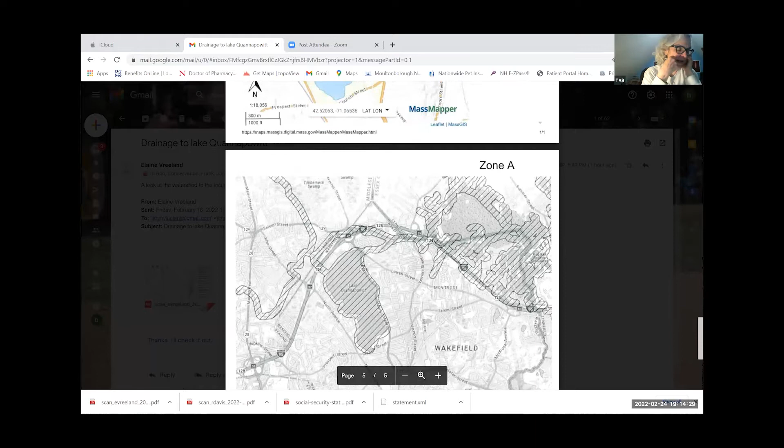Now, were you going to talk about the fact that Quannapowitt is a Class A water with Zone A? Rebecca had put that on, and I thought that portion of the discussion would be better left for the next meeting. I'm still trying to find out if projects filed before November of 2021 are grandfathered or not.

But it will be a Class A water body going forward. I thought that rather than give all that information tonight, I'd put together an information package on what difference that's going to make and send it to you before the next meeting. So for this meeting, we're just doing Lake Quannapowitt and its tributaries.

Just so you know which way the water flows—and there it is right there. Because Quannapowitt feeds into the Saugus water supply, Quannapowitt and its tributaries have now been classified as a surface water supply and a Class A water body, suitable for drinking. It was Class B previously, which is suitable for swimming and boating.

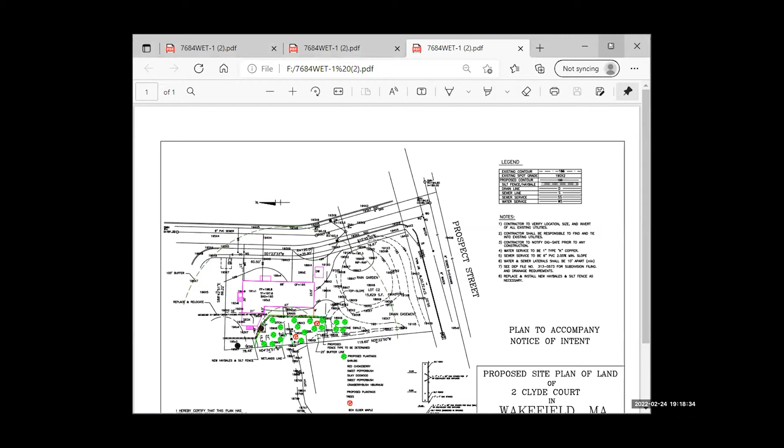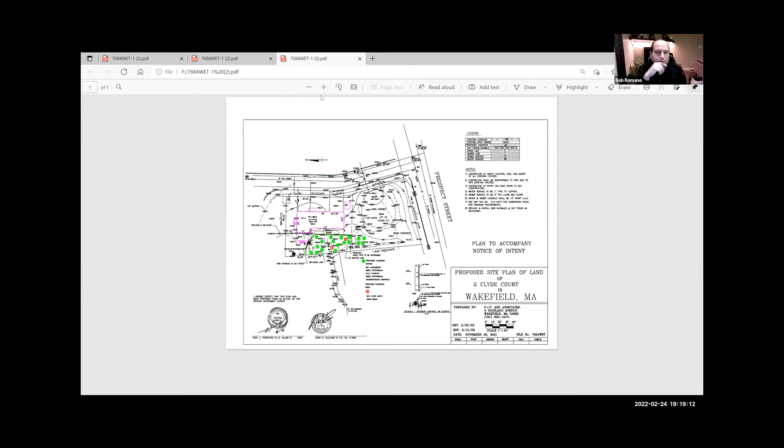Okay, you should have the site plan on your screen. Got it, let me zoom in. Can I zoom in on it? Scroll to the right and there'll be a plus. Actually more to the right, Paul, you'll see a minus and a plus. I'm looking for it, think it's behind, can I close that out? Actually no, just... there we go, I got it, right there. Let me bring that up. There you go.

Okay, based on our last meeting, we did a little bit of revisions on the locations of certain things. We were going to hold 8 feet off the rear of the building as a landscaped, grassed area, and we put in some plantings, relocated some of the plantings, and put in some new trees.

I've been in touch with James Emmanuel, who's doing the landscape work for us. He's on vacation this week so we didn't get to finish this up, but he'll be back Monday, so I can get the final planting amounts and actual locations on the plan. But I think you could possibly make that a condition.

So we did show the location of the new hay bale line, and also the proposed fence, which will start right here and run up along, then behind the hay bale, and then come back down right along the drainage easement.

Could you just again show the fence? Where is it relative to the hay bales? The fence will start right here in the corner, run up along to an existing 10-inch tree, then along the tree up to the hay bale line, then along the hay bale line over to the easement line, this is the drainage easement, and then back down to the intersection of the easement.

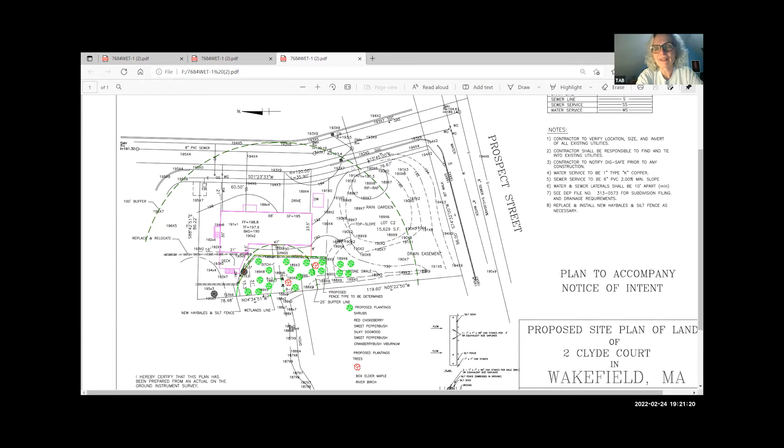Yeah, it's tough when it's on a 20 scale and you're trying to work in a small area. Yeah, because it's pretty much following the hay bale line, it mostly runs right along the hay bale line.

As for the size and type, I've talked with the owner. There's the possibility of either a metal fence or a metal post with a laminate on it, like plastic. We'll either do a hoop chain, like a double row going along there, or we might use granite posts. Those will actually last a lot better than putting in a cedar fence. Agreed. I also expanded out the planting area to outside the 25-foot buffer.

That'll be in this area, right along the swale. Then again, on the opposite side, right in this area here. So that basically accounts for the lost area of the 25-foot buffer between the house and the hay bale.

Now, Paul, how did you pick out the locations for the two trees? What was the design criteria for that?

Well, one's a pretty fat wet one, so that one is close towards the water's edge. That's this one down in here. And then this one's a little bit closer but it's still a wettish area, just a little bit more upland. I've talked with James, we were going over the different plot trees, and he's going to come back to me on the specific ones.

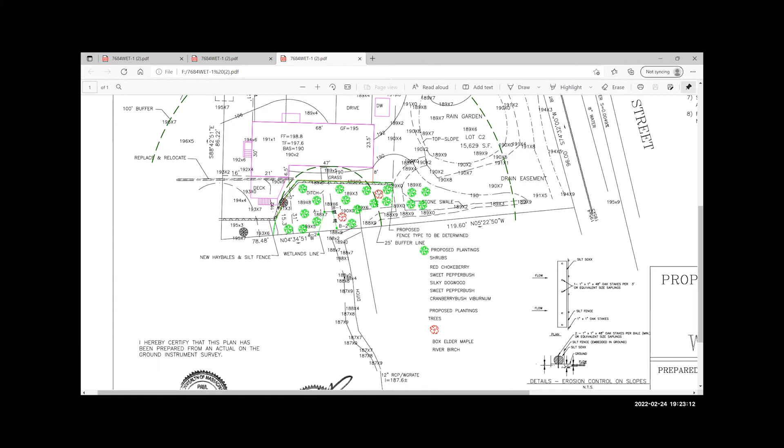So that one tree, Paul, how far away from the house is that? I'm just thinking of when it gets to a mature height, how big would it be? It's a medium height tree, so it's gonna be probably about another 8 feet, so it's 8 feet off the deck, 16 feet off the house.

Paul, I remember we did ask for the deck to be squared off. We kept the deck the way it is. The deck is the same where it is now because we need a second means of egress, and that's actually coming out of the dining room. The next door is a bedroom.

Was there anything else that we asked for? The other thing we talked about was the possibility of doing a conservation restriction.

We can, I mean, I can draw that plan up and review it with either Rebecca or Elaine prior to its finalization. That could be part of what's written into the deed and recorded at the registry.

And what would that conservation restriction say, Paul? Basically, that it's a no-touch zone. You can't go in there and cut the trees down, bushes down, put in grass, fill - that would be important. Or move the fence? Move the fence, yeah.

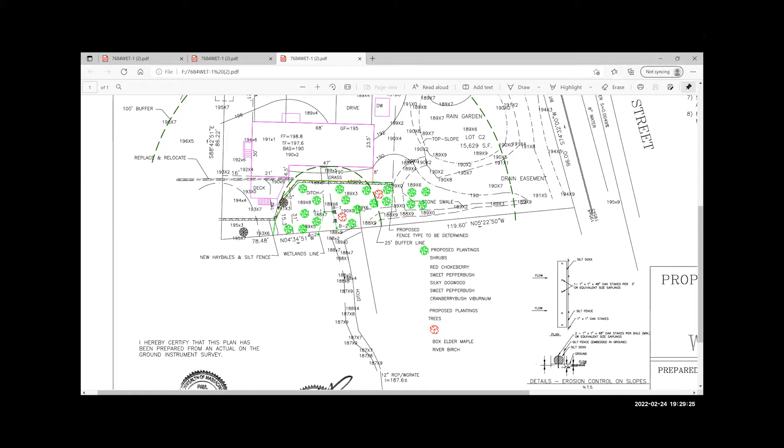Wait, so I'm sorry, could I interrupt just before a final vote is taken? A question for Paul - is this planting plan and the landscaping list and the conservation restriction going to be submitted within 21 days? Yes, it is. Okay, thank you, that's all I had. And we'll add those items as conditions.

Since we'd be accepting - well, why would we issue the order until we get those things? Well, we could condition those things in the order. We can do either. We could wait, or we could condition those items.

Why not just issue it at the next meeting? Well, that's assuming all those items are gonna be done by then, Judy. So, Elaine, just to clarify, after the public hearing is closed, we have 21 days to issue an order of conditions? Correct, yes.

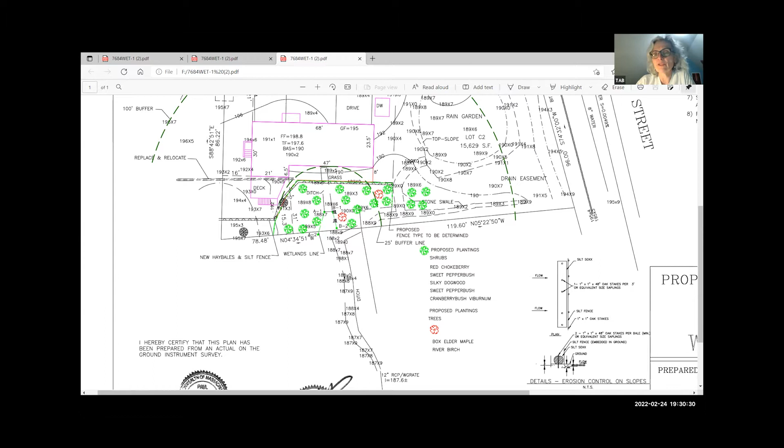Again, I'm gonna propose that we don't issue the order until we get what we want, but that's just me. Paul, you think you could have those items for the next meeting? Yeah, I'll have them submitted in, yes. All right, so then in that case, we could continue and then close at the next meeting, if that's amenable.

What's the date of the next meeting? March 10th. Okay, I won't be here March 10th, but I'll make sure the stuff is submitted in. Okay.

That way we would not have to add those special conditions, because obviously if we close, we can't accept any new information unless it was conditioned. That's fine, so okay, we'll do that. We'll continue until March 10th. Okay, all right, thank you. Thank you.

All right, we do have about 15 minutes before the next public hearing. We do have some other business to attend to.

Would you ask if Matt Callahan is here? He has a request for tree removal. I think you addressed this at a previous meeting and you wanted more information.

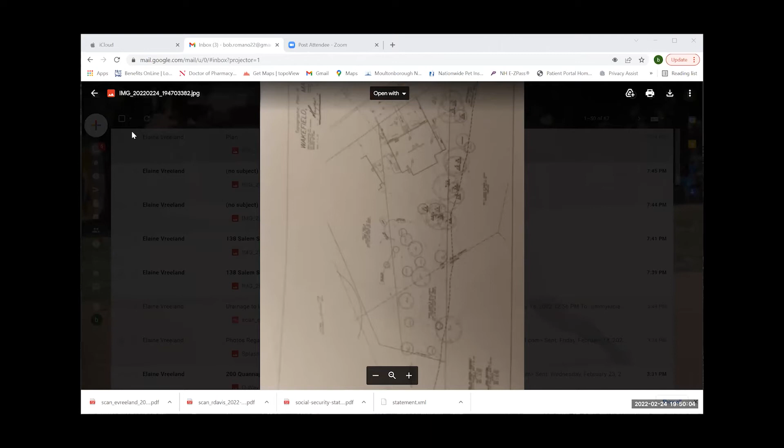All right, Elaine, I've got yours, Elaine. Let me share that. It's kind of hard to see, but we will give it a shot. All right, a little difficult to see, but here's... good, the photo from Elaine.

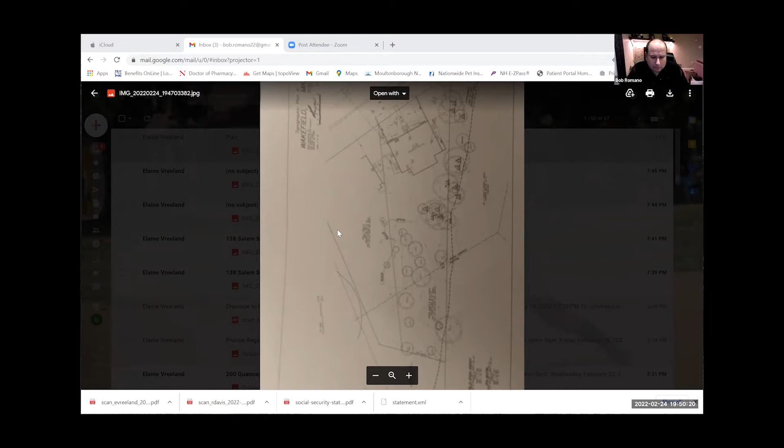Okay, can you rotate it? I don't know if I can rotate that. No, I can just zoom it. Okay, well, let's zoom in a bit. Bob, any chance you got my email? Not yet. Okay, I think I'm doing this off my cell phone, so the print is small.

But I think on the right-hand side, you can see a dotted line. That's the 200-foot riverfront. So those are the trees that are in, and it looks pretty much like almost all of them, certainly the ones near the street. I can't pull it up to see the ones in the back, but it looks like pretty much all of them are. Yeah, I can scroll down to see the ones in the back.

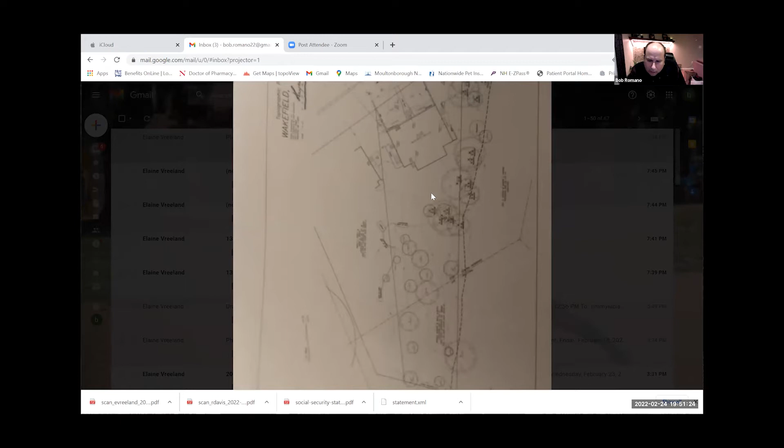I'm not sure. You can see the shoreline, right? The 200 buffer zone, the dash line. Everything to the left of that line is in. And to the right is out. So it looks like there's one small tree that might be out up here, but the rest are all in. So that would mean they would all be jurisdictional, everything that's showing.

Yeah, how many trees are you talking about? The ones with the triangles on them? So some of them are pretty far away. Why would you have to take those down? It's just that in some of the pictures, the trees were just growing crooked and they seemed like... I know, but isn't that kind of Mother Nature, the way a tree grows?

No, absolutely, I agree. It was just one of those things where when I had the tree guy there, he was just, if I'm here for the day, we can take out all these. And I'm like, yeah sure, if it's possible. And again, I had to call you guys in order to do so.

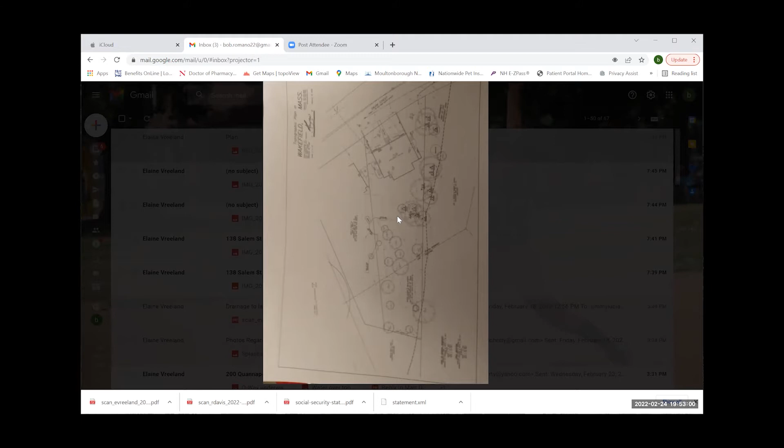I can understand the ones further away. The ones all on the left side are just tight to the house, and if you got next to them and looked up, you'd see the limbs would go up and they sort of dangle in the direction of the house. Like I say, my attitude is I just want to remove them, and I'm more than happy to put trees back because I'm a big fan of that, just to sort of try to maintain the vegetation.

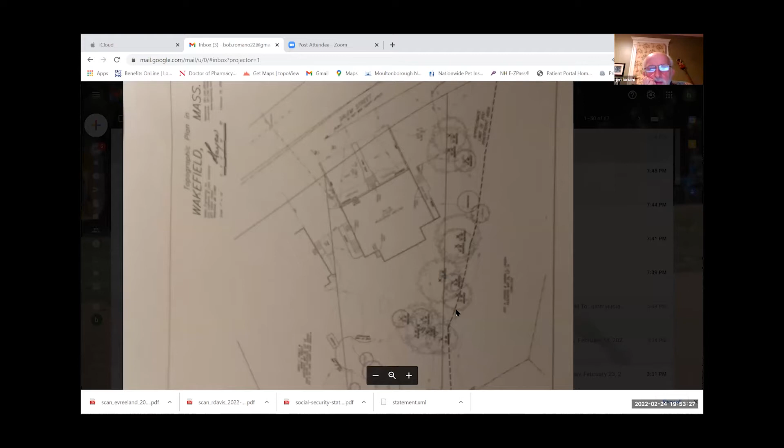I mean, I look at that. I don't think you should be taking them all down. I can see some of them are very close, there could be a problem. Right. Yeah, like where he's got his pointer now. I'm sure those are close. Yeah, the ones right by in there.

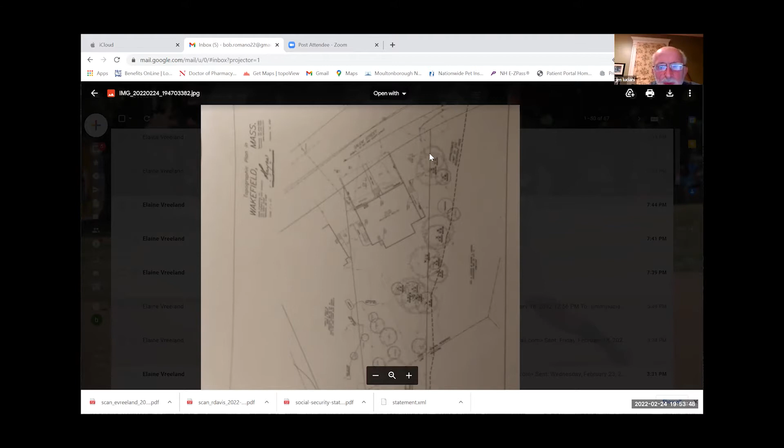And how about the front ones too? They're not even going towards your house, they're heading towards the street. Unless you think it's going to fall down. Is it uprooting itself? Pardon me, is it kind of uprooting itself? It's just, I mean, I'm no expert. They just... well, there's one that's hanging out over the street.

Okay, and these ones, I'm not sure if they're proposed to come down, but they're on the edge of the grassed area, the one with the little tree house in it. Those are the furthest ones away. Would you be looking to take those ones down also?

Yeah, I'd like to, but obviously if it's something that you guys don't think I should do, then I'll leave them. I don't have a problem. Can we ask Elaine for her take?

Those trees that you're seeing there, I measured are about 40 feet from the back of the house. The other trees, as you come along the side, are about 20 feet. I included some photographs that give a good visual showing the trees relative to the house. All of those trees are mature. I took pictures of the canopy to see how healthy it looked, which is a good way of gauging their health, especially in winter.

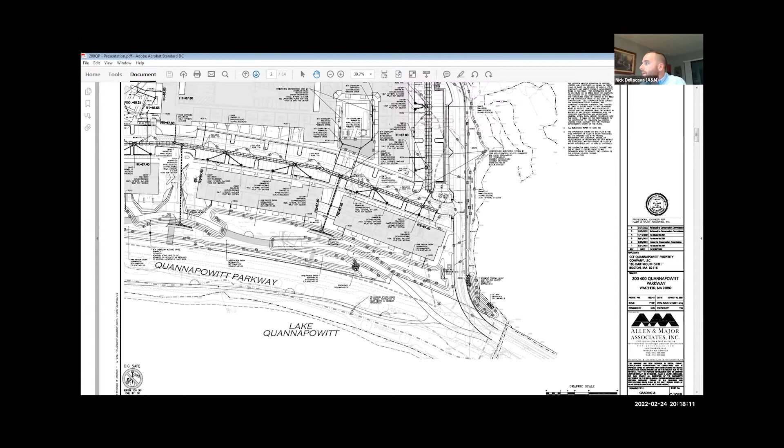Of course, we're limited as to what we can do to handle and treat the runoff from within the parkway itself. The low points are consistent with what's there today to maintain the compensatory flood storage around the perimeter of the site. So that's really the only updates we've made to the plan — everything interior to the parkway remains unchanged.

And one more thing before I open it up to comments — we also provided some examples of previous projects where we've used similar BMPs. I know this came up at the last hearing.

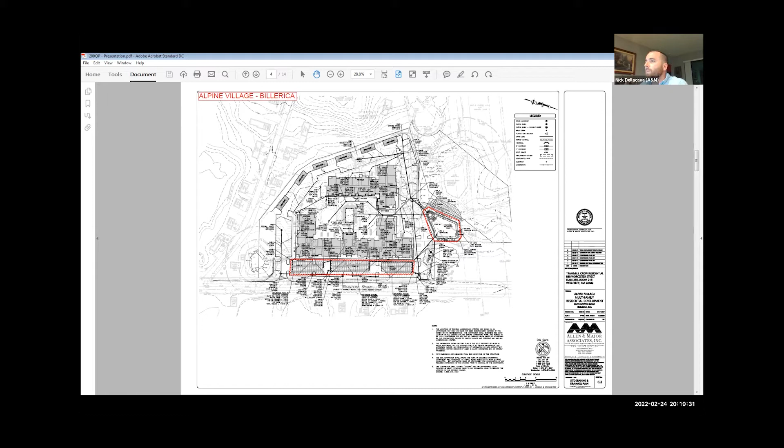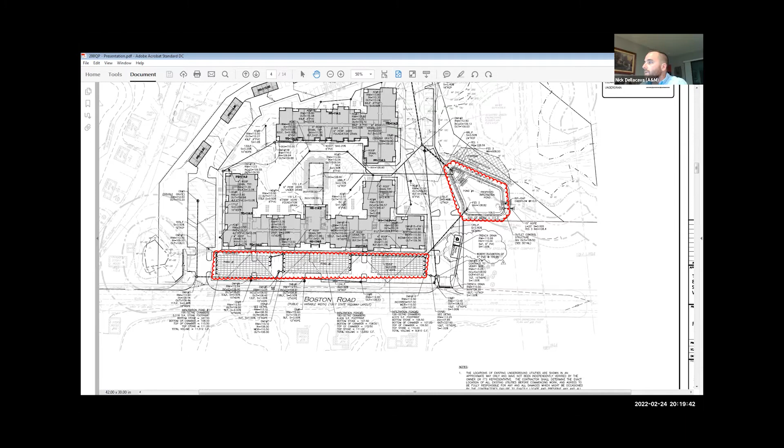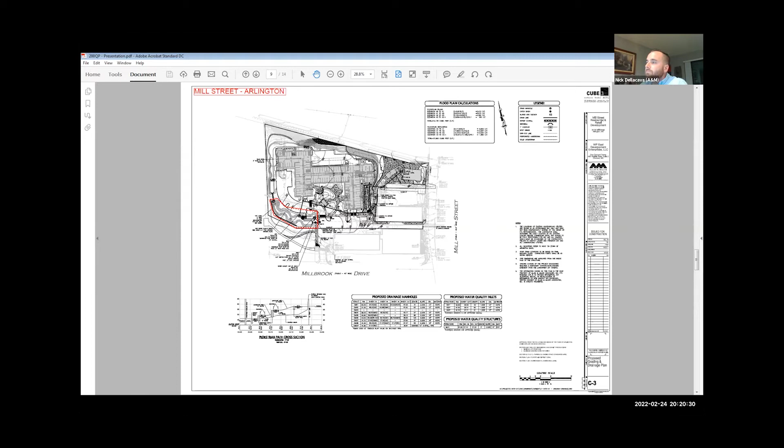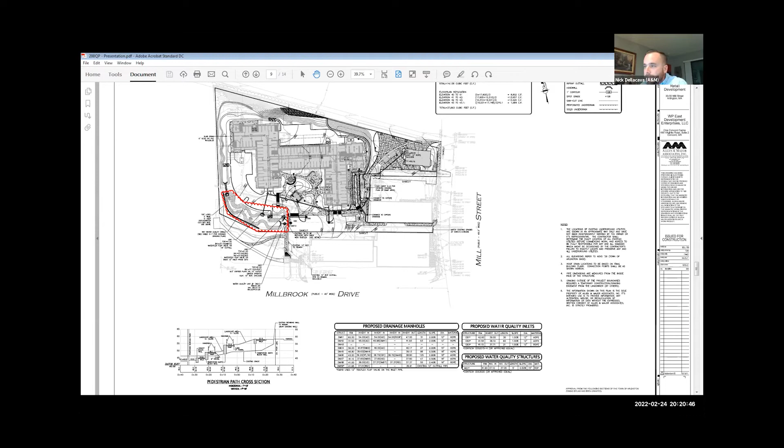This is an example on Mill Street in Arlington. We had not really a wet basin — it's called a wet water quality swale. It's a different type of BMP, kind of a hybrid between a wet basin and just a standard infiltration surface basin. This is a closer detail of it.

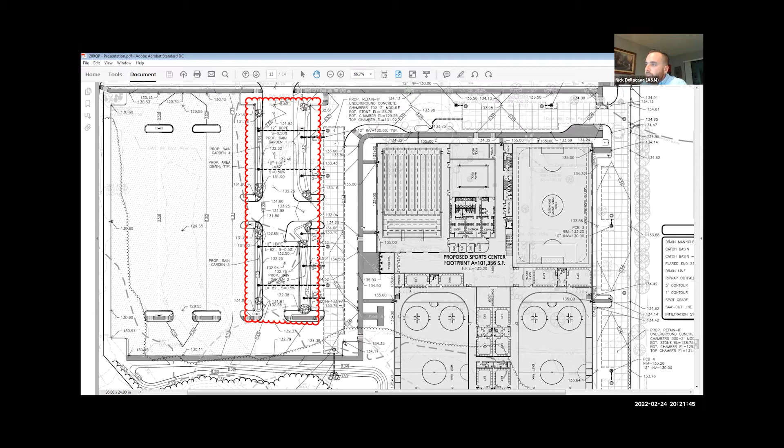So I'm sure there's probably more comments on some of the updates we made with the forebays. But other than that, I figure we can go over this first and then get into the nitty gritty on the peer review memo, which will probably be handled mostly by Goddard Consulting.

Nick, could you just go over how the bioretention system works? Sure, do you want me to use the example on our site? Yeah, on your site. So on our site, we actually have a very similar condition to the last example I just showed you. This is one of our bioretention areas in the landscaped island.

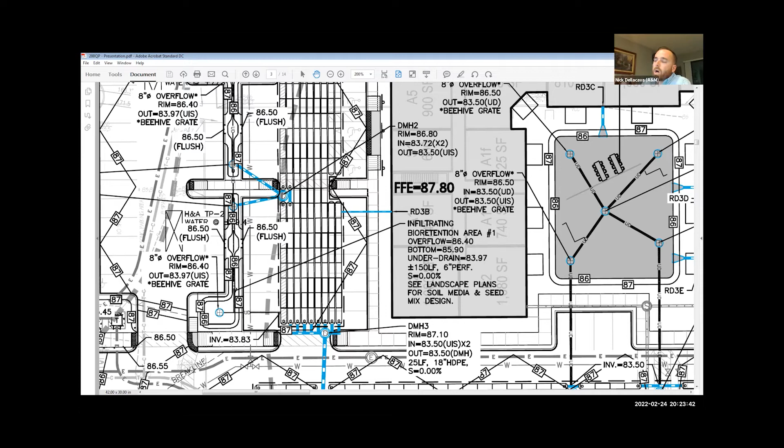The water from this surface parking area that I'm circling will all sheet flow into some low points. You can see the flush condition here - there's one on this side, one on this side, and similarly on the northern side. Water will sheet flow into those bioretention areas, fill up with water, and then infiltrate into the ground. Under larger storm events, where it's not able to infiltrate fast enough, you can see in blue these overflow outlets. They're essentially just little area drains in the green space. As the water ponds to about a depth of 6 inches, they'll begin to overflow, and they're connected back into the underground chambers.

So that's one bioretention area, and then we have two more - one in this courtyard, and a third one in this courtyard here. Both of these courtyard bioretention areas function the exact same way, so I'll use this one as an example. They handle any runoff from the green space - if there's any sheet flow from the grassed areas, it'll go into the bioretention area - but primarily they're there to handle roof runoff from the building. You can see these roof drain downspouts that will discharge into the bioretention area. Again, they can pond up to about 6 inches before they begin to overflow and discharge directly into the chambered system in the parking lot, running through the neighborhood driveway.

Okay, one other question - where it says elevation 86 to 87, is that a vegetated area around there? Yes, so the hatched area, everything in here is vegetated. The hatched area is what we use for sizing the bioretention area. But obviously that'll be vegetated, and the white space around it will also be green vegetated space - it'll be landscaped. So is the bottom of that area all at 86, and it just comes up a foot? That's correct, yep. So the finished floor elevation is up at 87.8.

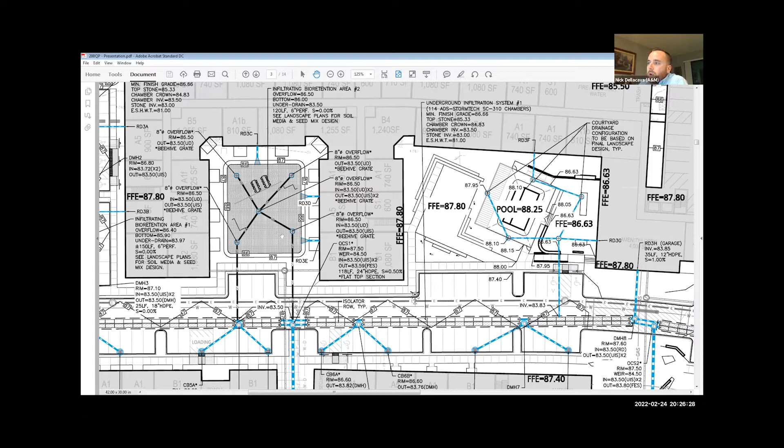Okay, and what kind of density do you have for the planting? What type - is it trees in there too, or just herbaceous or woody stuff? Yeah, mostly shrubs and perennials - I'm not a landscape expert, and Allen & Major isn't the landscape architect for the project. There'll be Copley Wolf, but there's no trees in the bioretention area itself - it would be planted with mostly shrubs.

In an overflow condition, it makes its way into the buried chambers under the paved area. I can go through where the rain starts and where it ends.

So all three of these bioretention areas overflow into the chambered systems. All the chambered systems in this parking lot, as well as the one through the neighborhood driveway and the one in the parking lot to the right, are all hydraulically connected. They're all at the same exact elevation. So as those chambered systems begin to fill up, they'll infiltrate what they can. But under severe storm events, those are going to start to back up, and the water is going to have to go somewhere.

That's where these three outlets come into play. There's a large 24-inch pipe that's going to be run underground between these two buildings, a second 24-inch pipe between these two buildings, and a third here. Those pipes overflow into a level spreader that outfalls into the larger infiltration basin along the back of the site.

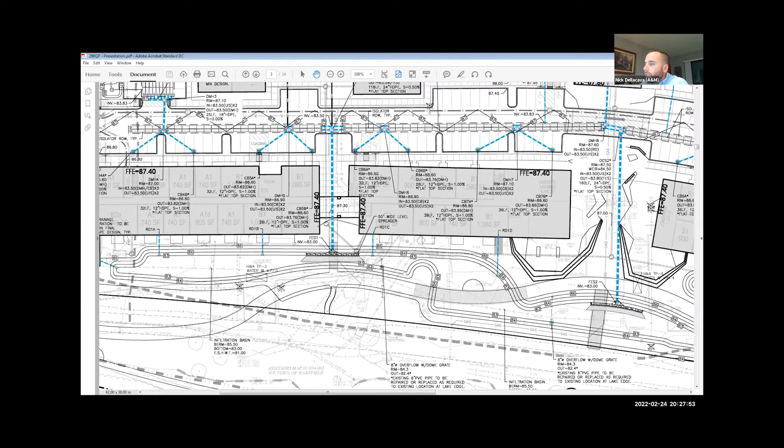I'll zoom out here for a minute. The infiltration basin, from my cursor to the left, runs all the way through the site below the walking bridges and the meandering path. It continues on all the way behind the buildings. That handles any overflow from the chambers. It also handles runoff, all the roof runoff from building 1 and building 2 back here, and that's also designed to infiltrate into the ground.

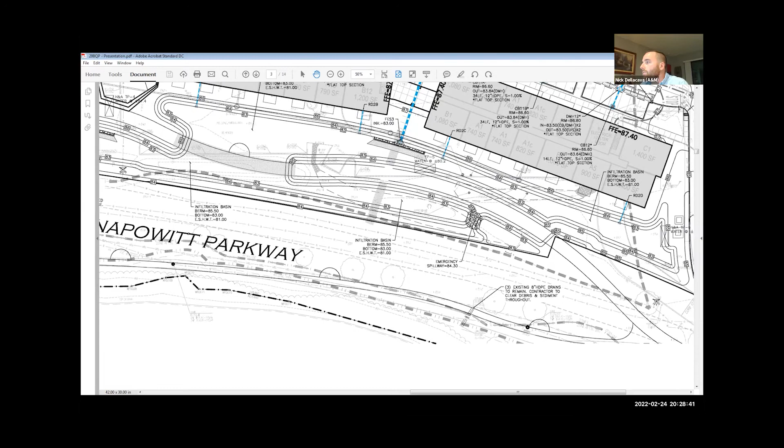But again, we always want to have an overflow during severe storm events, and at that time we have the emergency spillway located here. The basin will fill up and spill over into the existing grass space on our site, and then beyond our property where it currently discharges today. There's these three existing 8-inch drains that run below the existing path up against the lake, and those discharge directly into the lake. Just to give you some reference, I don't have the existing conditions up right now.

I can pull it up if we need to, but you can see in the background, it's shaded, the approximate drainage area. That's existing drainage. It's kind of like, I don't really know what you'd call it—it's almost like a wet basin because it doesn't really drain today since it's so low. It's down at like elevation 82.

But what that does is it fills up and overflows at this same exact point right here into the grass swale and into those HDPE drains into the lake. So we've maintained all the existing outfalls. We're not proposing any new discharge off-site.

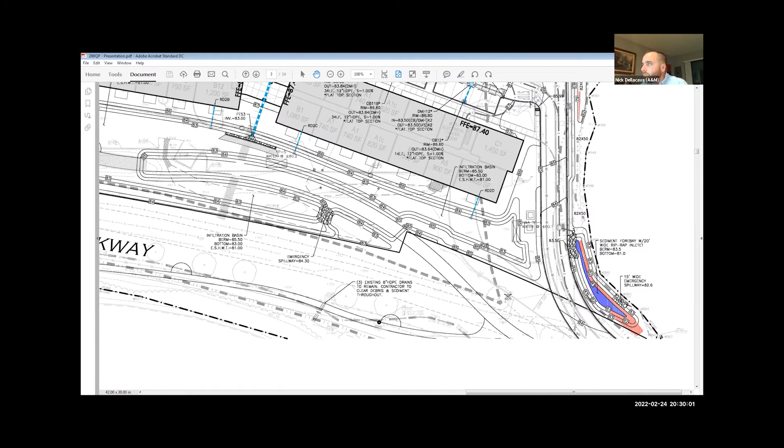And then of course, those systems I just went over handle every bit of runoff interior to the parkway. Now, when we look at the parkway itself, because of the floodplain conditions and all the resource buffers, we're limited, as you know very well, in what we can and can't do to manage and treat the stormwater. So that's where these forebays come into play, to try to provide some sort of TSS removal for the runoff within the parkway.

Okay, sorry, let's just back up a little bit, and I want to take a look at the roof runoff in each area. I know some's going into the bioretention areas. Yep, some looks like it's going directly into the underground chambers.

Yeah, that's correct. The way we've modeled this and the way it's going to have to be designed, once we get a plumbing engineer on board and if and when we start going for a building permit, that'll be a discussion and coordination I have with them as to what portions of the roof are going to be able to drain into certain areas of the site.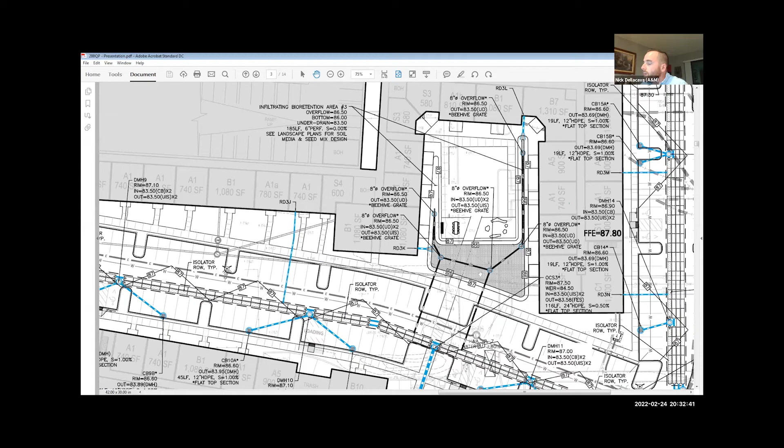And then similarly, as to the left side of building 3, this has been split kind of like down the middle, where half of this wing is going to go through the flared ends into the bioretention, and on the back side, they'll be piped directly into the system.

Building 1 and 2, this is all built. This is building 1 as a whole and building 2 as a whole. All of those roof drains will be located on the back sides, closer to the lake, and all of that roof runoff will be discharged into the infiltration basin.

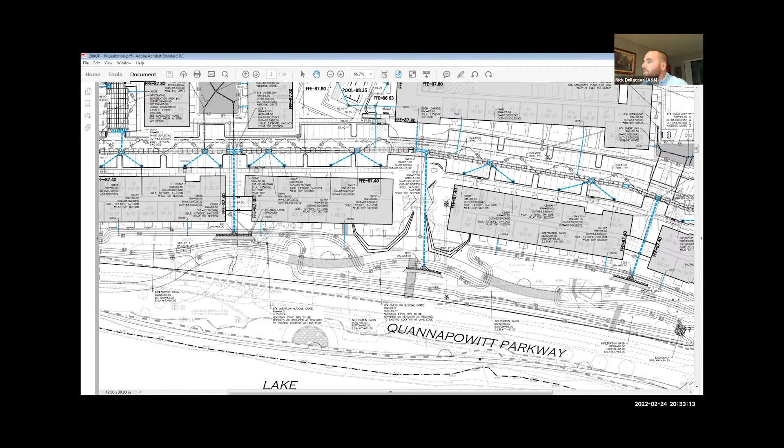So as you can see, everything's intertwined, hydraulically connected. Everything's sized based on the area that's going to it. If we were going to send more roof runoff into the chambered systems, the bioretention areas would get smaller. But the way we approached the design was to maximize the bioretention area in these courtyards. That was a preference from the town engineer. They like to see surface BMPs, like surface infiltration basins, bioretention areas, wet basins, rather than underground systems that could have the tendency to be overlooked if there isn't a proper operation and maintenance plan in place. So we maximized those bioretention areas, we sent as much roof runoff to those as we possibly could in order to reduce the size of the underground chambered systems.

So the garage, it's got retail on the first floor facing the lake or something? Yeah, right there. That's garage plus units or stores, right? I don't know the building footprint as well as maybe Matt D'Amico does, but the garage is multiple stories. My understanding is there's no units in the garage footprint all the way up, but there is units along the front that go all the way up. So all the roof runoff from that is coming to those two leaders in the front of the building.

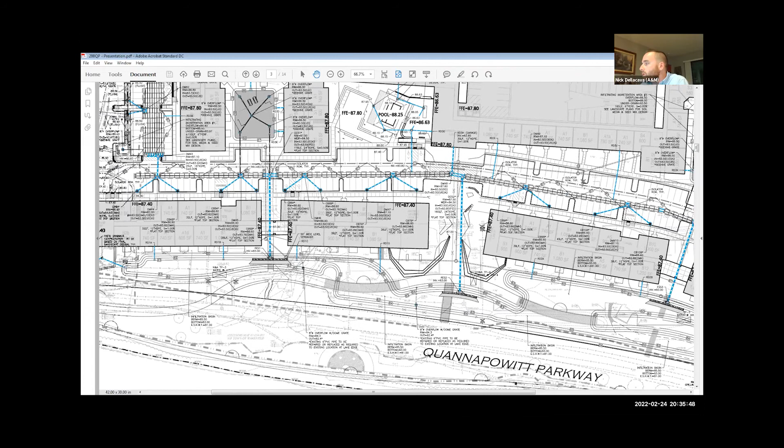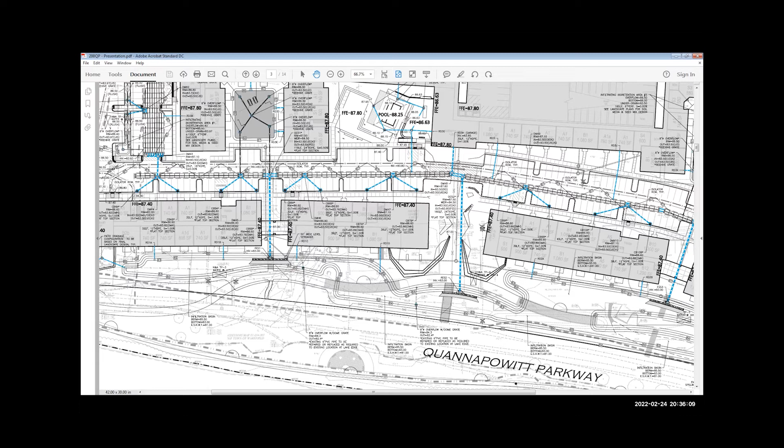So the retention basins, what are they vegetated with? These basins in the back? I hate to quote anything because again, I wasn't the one designing the landscape and I'm not as familiar with it. But it's similar vegetation to what's in the bioretention areas. And I believe Copley Wolf has shown trees along the banks or at the top, beyond the footprint of the bottom of the basin.

So do you anticipate that the bottom of the retention basin would have water in it, or do you think they're going to be dry? No, they should be dry. What we've discussed with the town engineer, and our details portray, is that any unsuitables need to be excavated and it will be replaced with Title V sand down to a virgin soil. And on top of that, we've established the seasonal high water table at 81, which I went into detail at a previous hearing, but it was a conservative number. There were plenty of test pits out here that estimated the water table at a much lower depth, maybe closer to 77 or even 79. But we held 81 as the seasonal high water table, and we've maintained 2 feet of separation per the stormwater handbook requirements from the bottom of every BMP that we've proposed.

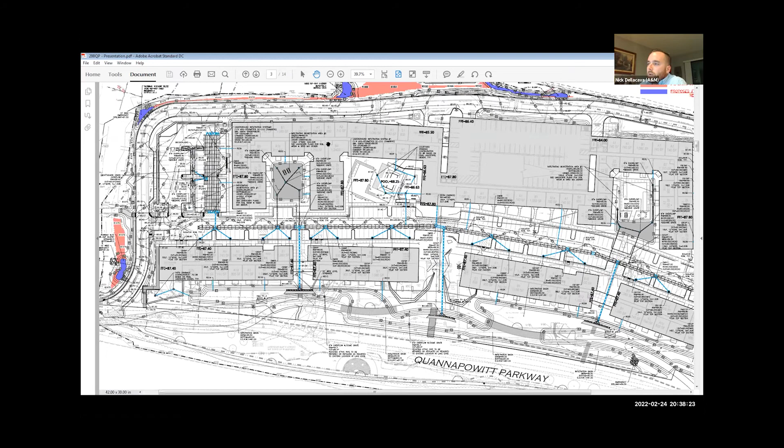So there are situations where roof runoff and road runoff or parking runoff are being combined into the underground storage chambers. That's correct. And maybe I can guess where you're going with that. The roof runoff, of course, is considered clean by the handbook. There's no pre-treatment required, correct. And so you can see here, there's an isolator row on all these systems.

Yeah, it's that hatched row, and it's all the catch basins. They're all deep sump, 4-foot sumps with the hoods, of course. Those go into the drain manhole, and that manhole goes into the isolator rows. And what those isolator rows are equipped with is a membrane that doesn't allow those chambers to infiltrate right away. They'll build up and overflow into the second row in this case. And those have the stone bottom where it can infiltrate. Once it starts filling up the stone, the water can then fill all the void space around all the chambers.

So that'll get settling in the isolated chambers first before it makes its way into the stone bottom chambers. Yep, in order to prevent clogging, and it also makes for much easier maintenance. So when someone comes in here with a vac truck to clean these systems out, they don't have to clean the whole system—all they have to do is clean these isolator rows. Got it. And that's all in the O&M plan? Yep, it's all in the O&M plan.

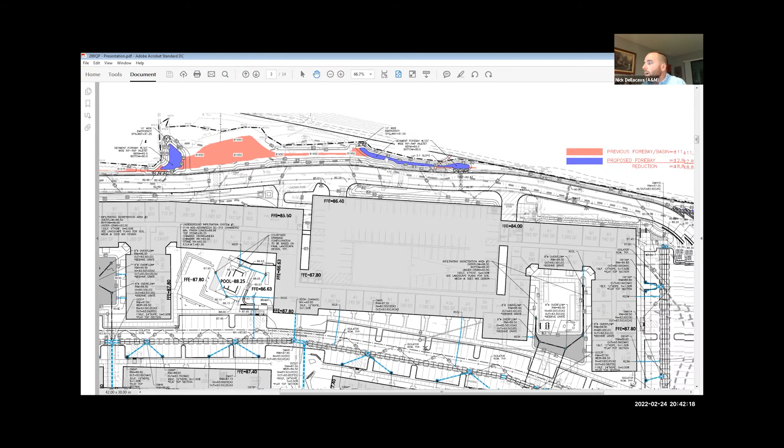It's really everything up to the wetland in some locations, not into the wetland. There's no disturbance to the wetland area itself, but the wetland seed mix will be planted pretty much along the tree line or up to the wetland itself. Like all these areas will be wetland seed mix.

So what do you plan on doing—putting wetland mix down every year to keep it, because doesn't it really just turn to grass like what you have? Well, I'm not an expert on plantings, but I'd imagine the wetland seed mix they use is meant to be a wetland mix and not turn to grass. I know, but I've never seen it really last long.

What about putting plants in there? Couldn't you do plants as well? Yeah, I believe we were showing some plants before with some of the wet basins, and we kind of dialed everything back to minimize any work in those areas. So if it's something you'd like to see, I'm sure we could probably add some plantings back.

I would actually—I think the planting would be far superior to the wetland mix myself anyway. Yeah, I'd agree with you, Jim, on that.

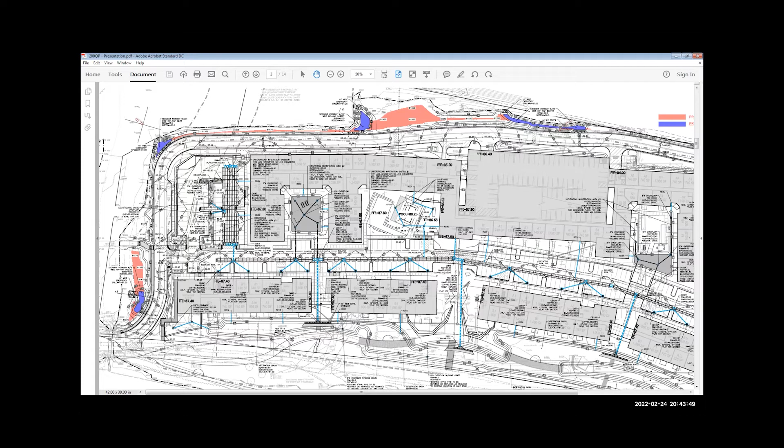So this is Mitch Maslanka with Goddard Consulting. Just to clarify, there are going to be plantings placed within the areas where it will be reseeding. Nick, maybe could I share my screen for a second? Yeah, of course.

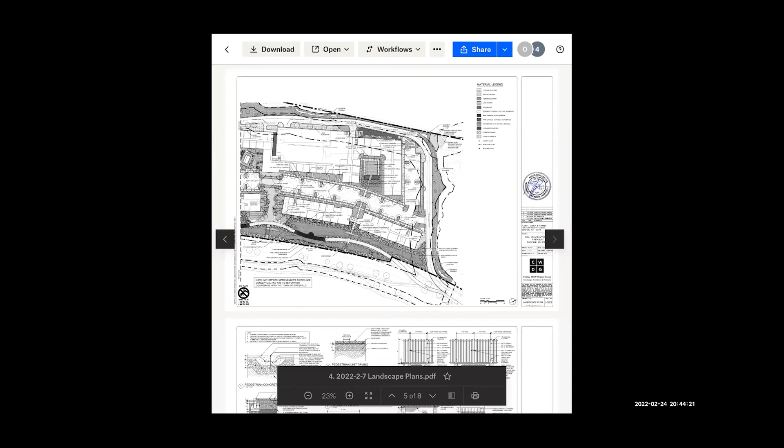So this is our landscaping plan here. Is it still up on the screen? No, just a desktop.

So here are our plantings. All of these small circles here are 2.5-inch caliper trees that are going to be planted in these areas where we're also proposing the seed mix. There's quite an abundant amount of these plantings throughout the parkway on the wetland side. Also in the riverfront area, we have a significant amount of plantings going in. And you can see these—those are transplants, going to be transplanted back within the buffer zone.

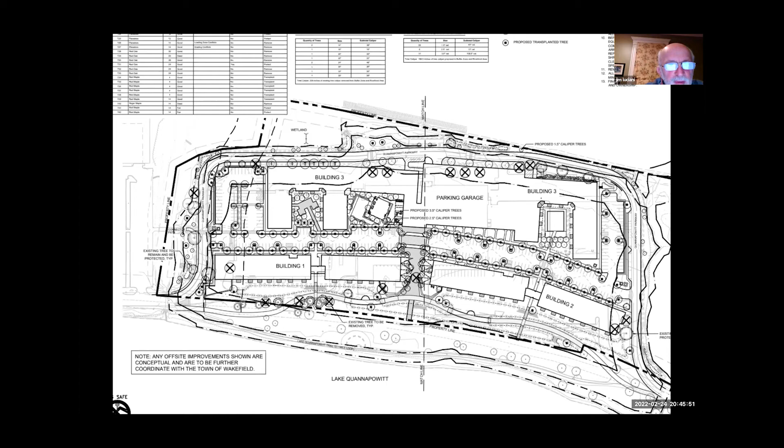I can't see where you're pointing. Can you see where I'm pointing now? I see the pointer, but I don't see any trees marked. Perhaps it's tough to tell on this screen, but these six in a row here are trees that are going to be transplanted. And these circles with the squares are the transplanted trees—we're going to take these two out and put them right here. Your mouse isn't quite calibrated with the zoom, but okay, we can see the transplant markers are right above where it says Building 3, and the edge of the building. Those are the transplants there, and they're getting moved to the other side of the parkway.

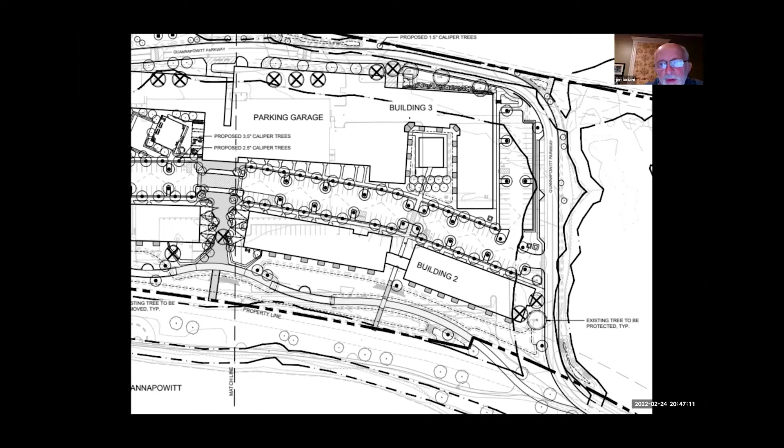Other than trees, are you putting shrubs in? Or anything like that? Or grasses, like ornamental grasses? I don't know if that's appropriate or whatever.

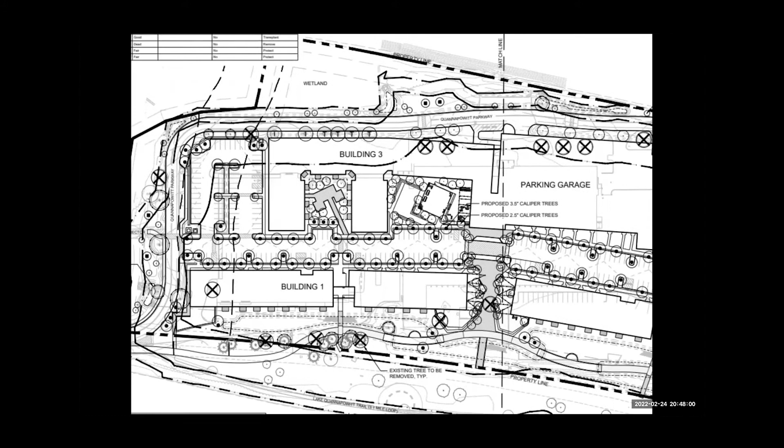So we have the conservation seed mix proposed, which has a wide variety of herbaceous plants, both upland and wetland preferable plants. We're really just proposing trees at the moment in these areas off to the side of Quannapowitt Parkway. Your tree protection policy, the easiest way for us to comply really was to just stick to trees rather than trees and shrubs. But the amount of trees we're planting is quite significant.

So I think that should be a positive thing for our buffer zone areas here. And if it makes you feel better, there's a significant amount of shrubbery along that forest edge. So if you give it time with that seed mix and seeding in from those shrubs, those areas will become naturalized in no time.

One other thing to note is this portion of BVW here. This was called out as wetland for its hydric soils and for primarily a specific plant called a rush, which is a grass-looking plant. This area gets mowed over during the dry season, like summertime, as part of this complex's typical mowing plan. So we're proposing to just stop mowing and let it naturally regrow. We didn't propose any trees or shrubs in there, but we are proposing to not mow that area anymore and let it regrow as a natural wetland.

Mitch, keep in mind your cursor is invisible, so you can't just point. I think the area we're trying to draw attention to is on the upper right-hand corner of your screen, where there's that 90-degree bend in Quannapowitt Parkway.

Just to the upper right of that, there's an indented area of wetlands, and we're allowing that to renaturalize. That's what Mitch was talking about. That's the area that's usually underwater quite a bit. Exactly.

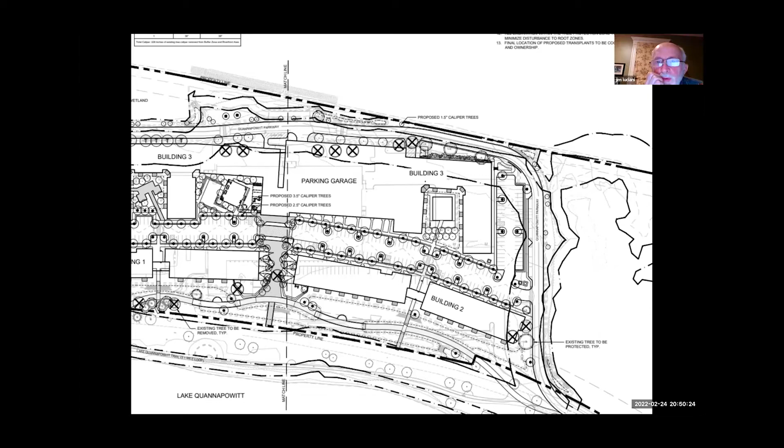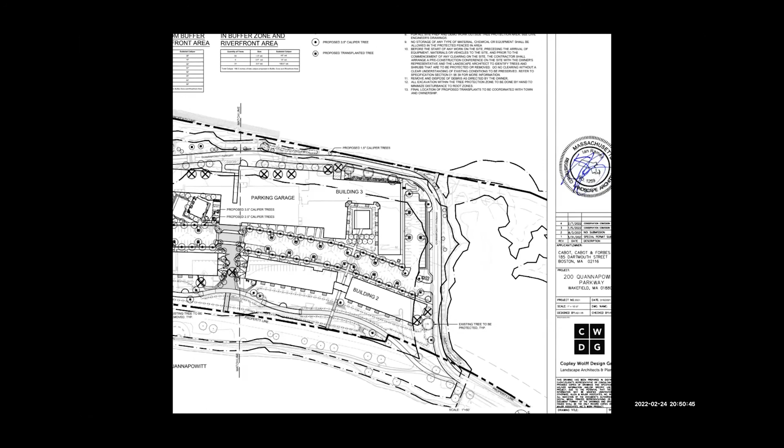Okay, so renaturalized means you're putting seed down and hopefully it mixes in with the grasses and grows. Correct, yep. And what does that look like when it grows?

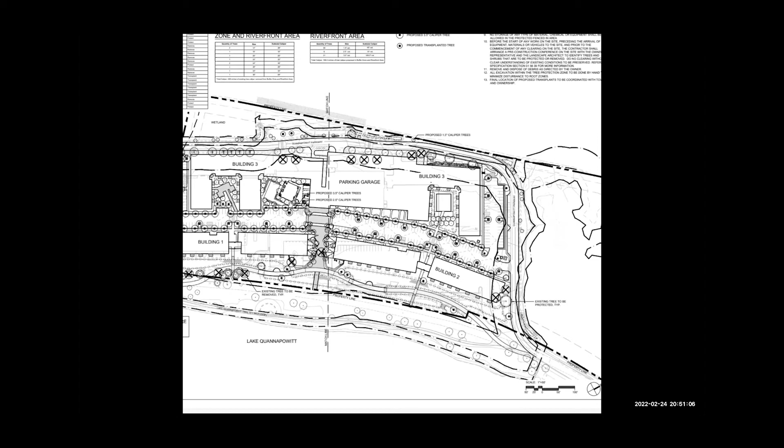I'm predicting that wetland area, when it regrows, it's probably gonna have some silky dogwood, which is a shrub that's abundant in the area. It's probably also gonna have sweet pepper bush, which is another wetland indicator species abundant in the wetlands nearby. And what's the time frame for that to mature?

For full maturity for the shrubs, that probably takes 5 or so years. But you'll see full herbaceous cover within one season. The seed has a wide mix of herbaceous species that will grow up seasonally—some spring preferred, some summer, some fall. Over the course of one growing season, without active management like right now, and with the placement of the seed mix, you'll see 75% coverage of herbaceous material, and the adjacent shrub material will continue to be able to thrive there.

So you will put some shrubs in? Well, Mitch, is there proposed shrub planting there, or are we just allowing the adjacent material to navigate its way in? In those 2 specific areas, we're just going to let nature run its course. Right.

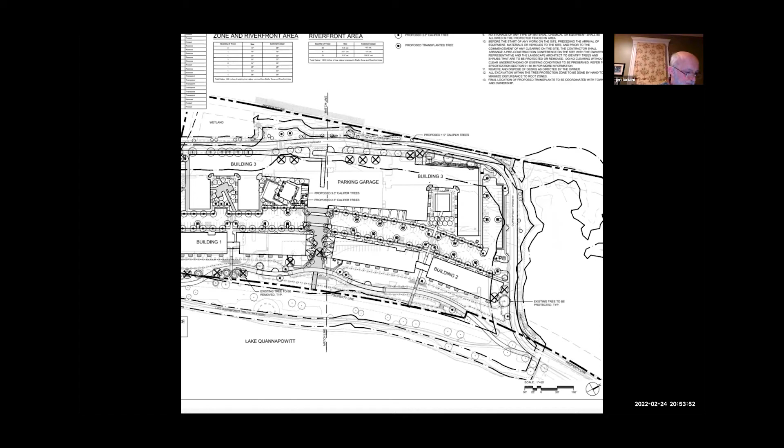So as far as the invasive plants, are you proposing to keep removing them until you annihilate them, or is this a one-shot, one-year effort? During our monitoring period, in the areas we're monitoring, we'll remove any that try to creep in, but we're not proposing to chase everything down to the extent of property lines and off-site. Surrounding areas of invasive plants require a more broad-scale effort of shared ownership, so we can only do our part, and we just want these areas to get off to a good start.

So is that what you meant when you wrote that you were going to get rid of invasive plants with the commission's approval? Yeah, until we have a certificate of compliance, we'll monitor our areas of revegetation, keep them free of invasives, and get the ecosystem established. Well, you should at least go through three growing seasons, right? Sure, that's fine.

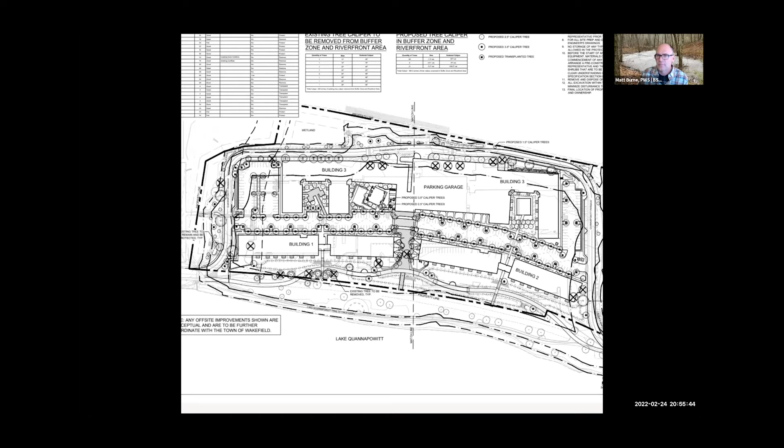The O&M plan covers that, to maintain, to avoid plant mortality, and to replant as needed. Yep, that's all built into the O&M plan.

And just to add to that, I'm not a landscape architect, but all these plantings should come with at least a one-year life guarantee. So if they don't survive the first growing season, they'll be replanted. And because of the amount of runoff they'll be getting and the species being planted, they should thrive in a lot of these places because it's open and will be receiving consistent runoff and rainwater. There's no expectation of any sort of drought, so I'd think they'd thrive there.

And of course, it's supposed to be a very nice development, so ownership won't want to let these plants die out. It's right in their backyard, right in their courtyards. They're going to want to maintain these and make sure it looks nice. Yeah, I agree with that.

Elaine, are you still here? Elaine is turned off right now. Sorry, I'm here. Is there anything you want to talk about?

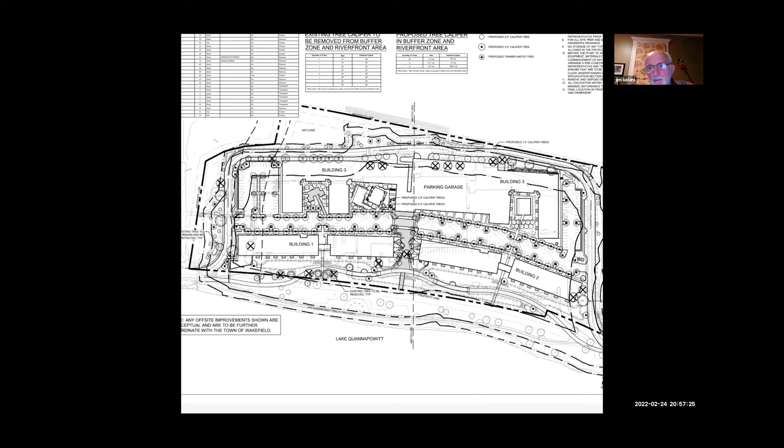Well, I did have a question about the lot size. I had looked at the plans and was going over the assessor's maps, just going over the notifications to abutters, and the two lots did not seem to have the same configuration to me. It appeared from the lots I saw on the assessor's map that this property owns land on the other side of the stream.

I can tell you that's incorrect. The assessor's lot lines on the map are, for whatever reason, not correct. So who owns that land? That would be the owners of 100 Quannapowitt Parkway, which is RJ Kelly Corporation. So the assessor's maps are not correct.

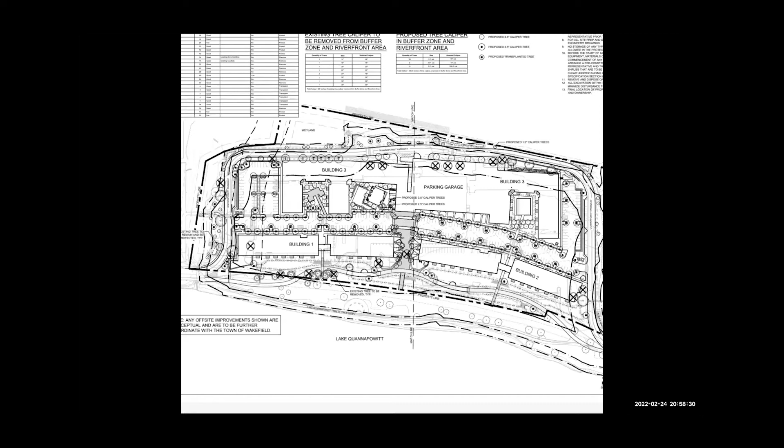Okay, all right. Would it be helpful if I showed the existing conditions plan? Yeah, sure.

So forgive me, I've always assumed that the Board of Assessors maps were correct.

So do you have any documentation that the actual configuration of this lot is different from what is shown on the Board of Assessors maps?

We don't own the property, but we can provide you with the deed that the previous owner received and the plans associated with that. Right, okay, because it appears to me as if you're paying taxes on property that you don't have to pay taxes on. But yes, a copy of the deed would be very helpful.

Thank you. In terms of the lot area as a sheer number, I believe they have it correct on the assessor's database. The sheer number of acres, it's just the lot lines on the GIS map - I don't know if it was a rendering error on their part or what, but we'll follow up with that information regarding the deed and the plans associated with it.

Yeah, thank you very much. You're welcome.

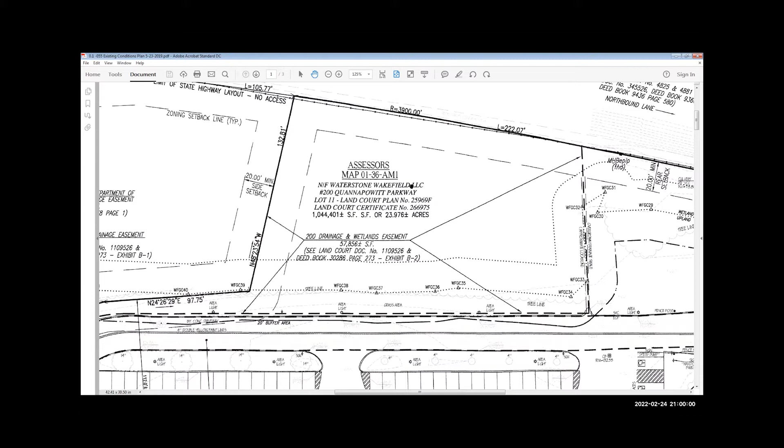One other question I had - I'm still interested in how you got that number for the amount of pollutants in the lake. Do you remember that number we were talking about before? It was 1.7, or 176, or 167, I don't know what the units were. But you were saying it was a long process. I wanted to see how you got that number, what the process was.

Yeah, so I could walk you through it, it might take a little bit. I don't know how much time you want to spend on it, but could you just send me a copy of it, of how you did it? I mean, you must have - did you put the number on there? Who assigned the number to that?

So the nutrient loading is assigned based on the type of use for the development, and those numbers are provided by the EPA.

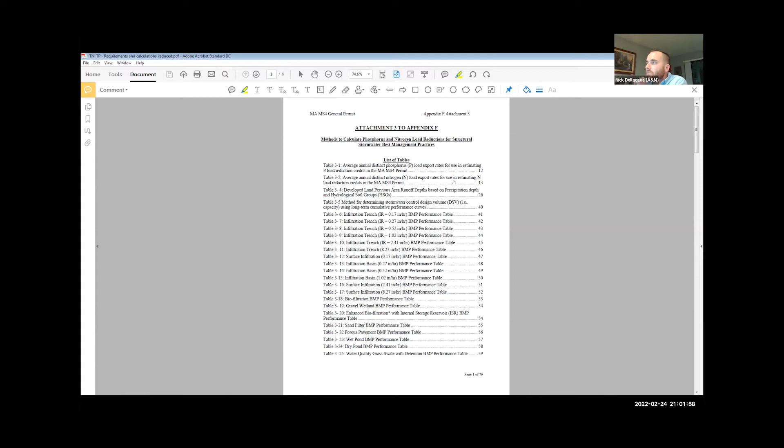Let me see, I can pull something out. Can you see this? All right, so this is from the Mass MS4 General Permit, Appendix F. It's all public information, you can find it right online. I kind of dumbed this version down based on the tables that we use.

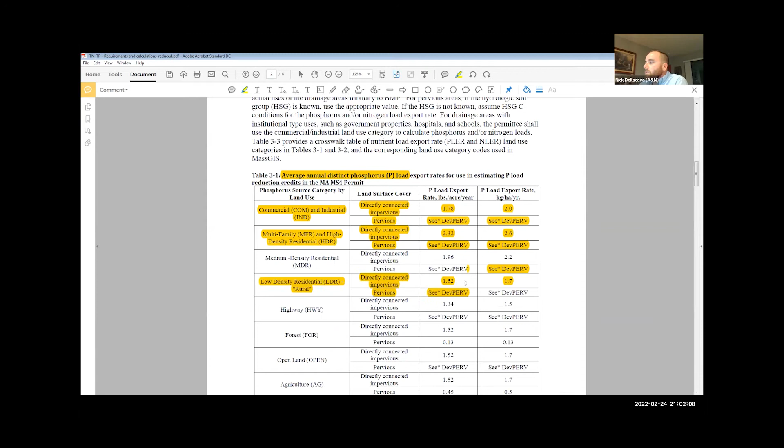And so this is where the loading comes in. This table tells you the phosphorus loading based on the land use. So we figured out the existing loading by assigning the 1.78 pounds per acre per year of phosphorus based on a commercial and industrial use.

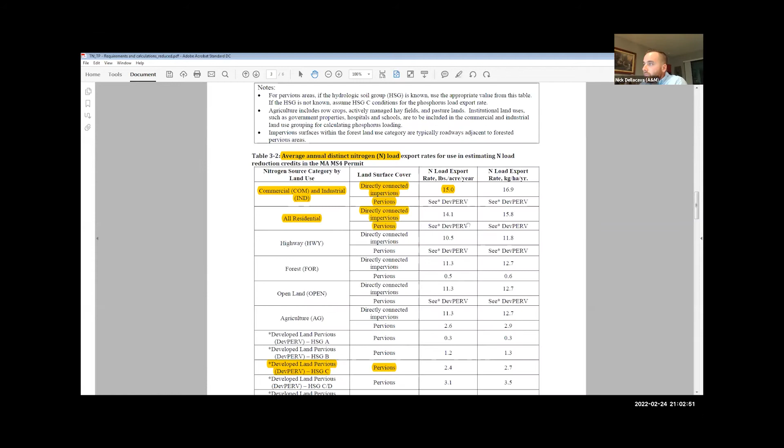And then we similarly did the same thing for what would be expected for a loading based on a multifamily, high density residential use, which actually has a higher loading rating. There's a very similar table - this is the nitrogen table. It's the exact same table with different numbers based on the nitrogen loading.

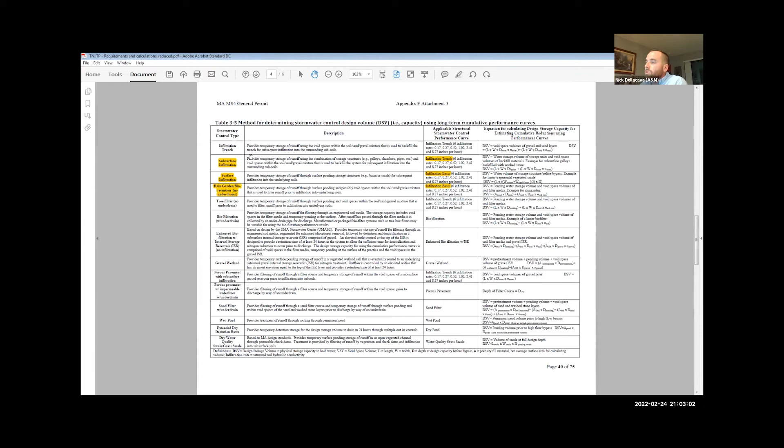And then we go to this table here, table 3.5. We find the type of stormwater control or BMP that we're using. In this case, we have the subsurface infiltration, those chambers. We have the surface infiltration, which is the larger basin along the back closest to the lake. And then we have the rain garden bioretention areas.

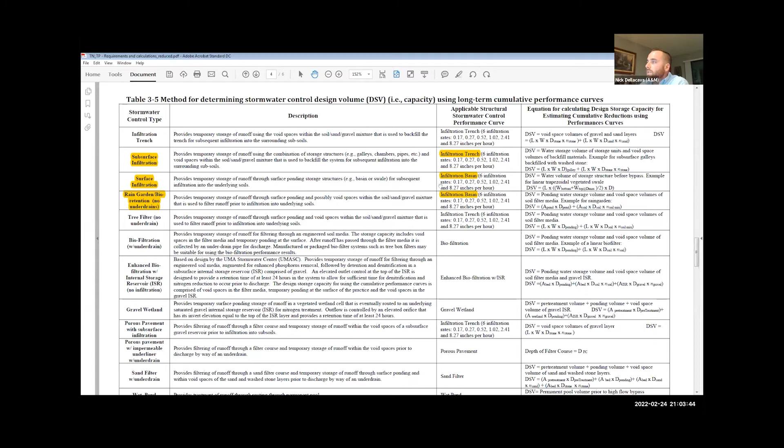The way we figure out how much loading we're removing, or how much pollutants we're removing from the runoff, we first need to figure out how big these systems are and how much runoff - the depth of runoff - how many inches of runoff these systems can hold before they go into bypass condition and move on to the next system, or just bypass and discharge into the lake, which would be the case with the larger basin at the back of the site. It's kind of the last discharge point. So we know the size and the volume that they can hold.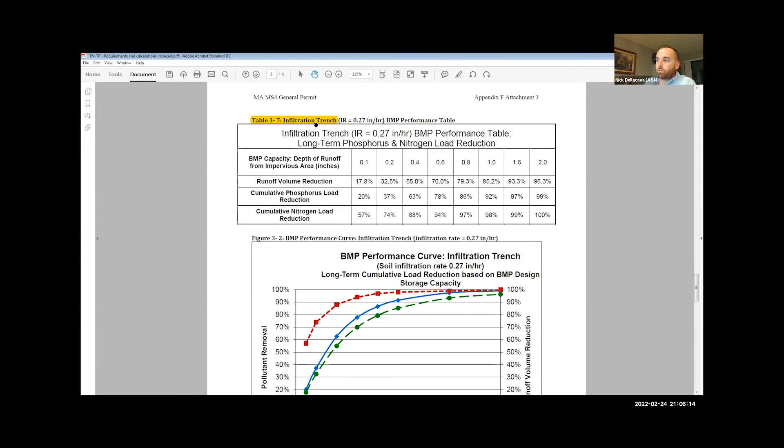The plantings get more involved - the handbook describes what types of plantings and the shapes and sizes of the systems. These EPA tables assume you've designed it according to the handbook. If you use the plants listed in the Stormwater Management Handbook chapter 2, it gives you a whole list of plants, and because they know enough about those plants, they know what to expect for pollutant removal.

Yes, exactly. I took EPA's word for it on this because they're a trusted source. So I assume that when they were coming up with these numbers, they designed the BMPs they were using for those studies based on what was outlined in the handbook. So that's kind of where the plantings come into play.

Okay, so the planting is needed. The only question I have is about one thing - somewhere I read, I think it was in some stuff Bill Renault gave me, they talk about the density of spacing. Is that something you're going to include in this as well, how dense you plant the plants? That should all be shown on the landscape plans - I believe they show exactly where they are planting each shrub and tree.

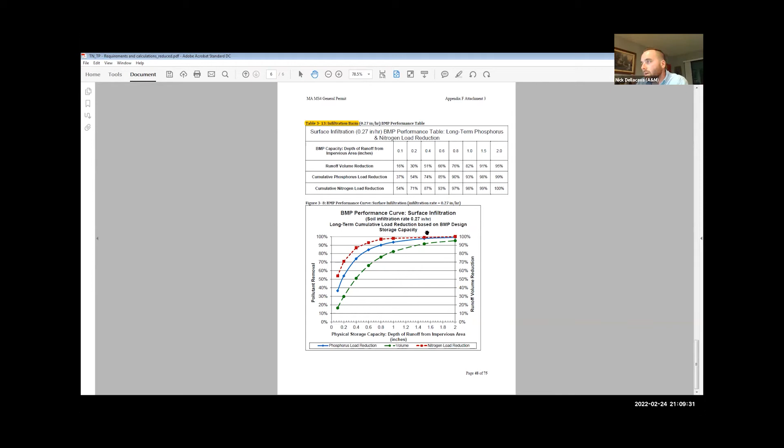Yeah, to an extent. A lot of the nutrient removal occurs with just holding the water back and allowing it to settle out and infiltrate into the ground, rather than - it's more about the volume of water you're holding rather than the species and number of plants in those systems. Of course you need the plants, they provide nutrient removal, but a lot comes down to how much water you're actually holding. As for density, Copley Wolff is a renowned landscape architect - it isn't their first rodeo. They'd describe the density better, but I assume they took all that into account and spaced the plantings as they should.

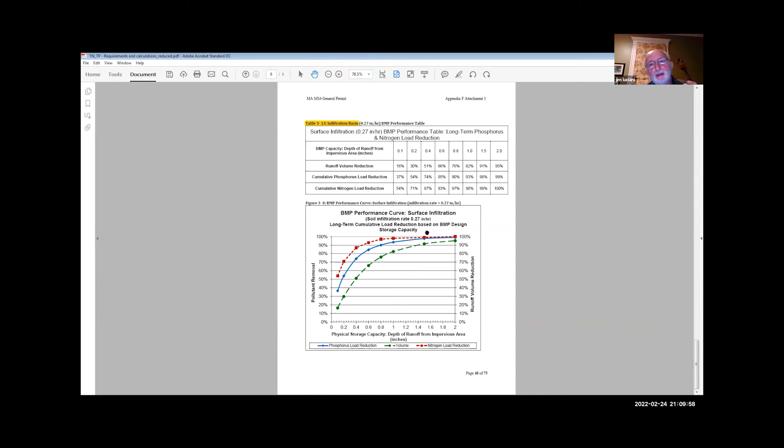The only reason I'm bringing this up is I was thinking, well, if the plants start to die off, they might not replace them. And if they don't replace them, does it get to a point where we're not meeting our goal for pollutant removal? That's what I was trying to nail down. I'd think since it's a high-end development, people will want nice things there, and you'd hope they'd maintain it - you wouldn't want someone deciding to take out all the plants because they don't like it. Doesn't that have an effect on the design? That's all I was concerned about.

Yep, and I mean, we should talk about how you're going to ensure that doesn't happen. Well, I know you guys will be. I mean, if you sold the property to someone else, they might have a different idea.

Yeah, I think that could be thrown into the conditions somehow. But I think the biggest insurance you have here is that it's a high-end development, and these bioretention areas are people's patios right here. Yeah, no, I know that.

And that was another reason why I was worried about whether the retention basins had water in them, because I'm thinking about mosquitoes, and their doorways aren't too far away either. Yeah, no, these are designed to drain.

These bioretention basins are up at 86, about 5 feet above the seasonal high water table. There should be no reason these don't drain. If they're not draining, there's some issues.

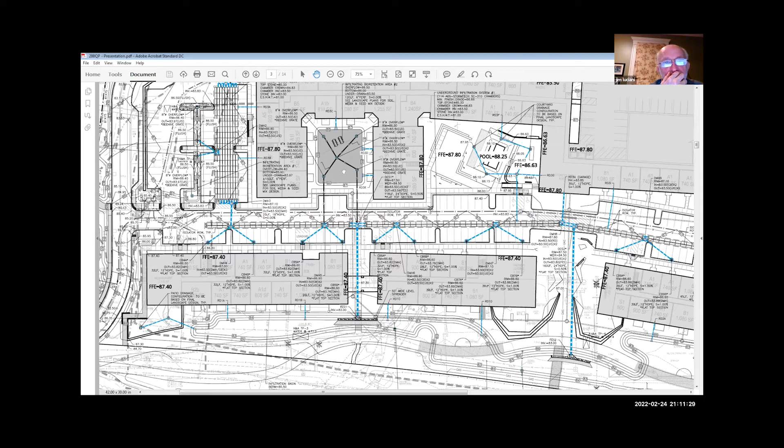And are you putting in the 30 inches of specialized material? Yes. Yeah, there's a DEP bioretention mix that is detailed on the landscape drawings.

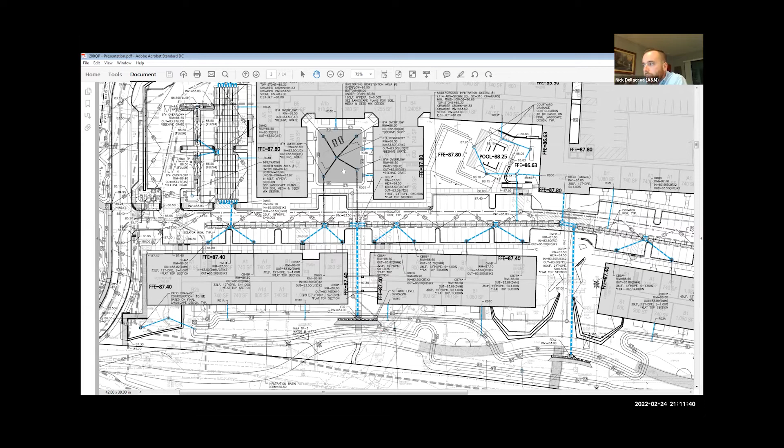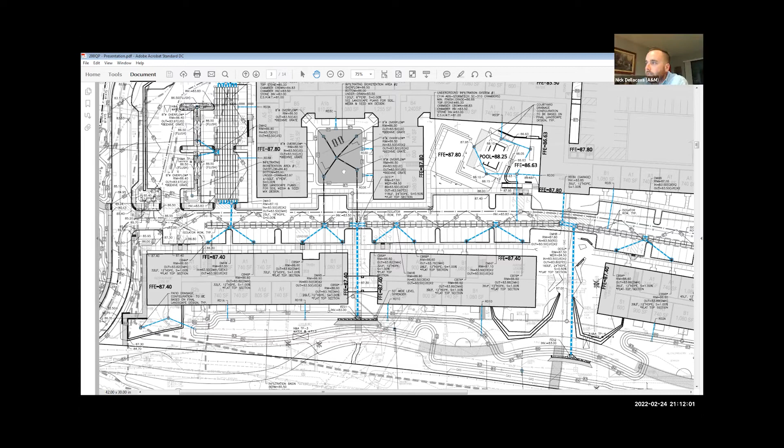Okay, and per the handbook, I think it's like 80% of all the nutrient removal occurs within the first 30 inches of soil. Again, that's kind of where a lot of the whole nutrient reduction occurs. It's the soils, it's the volume of water that you're holding and capturing. It's a whole different science than what you guys would probably be doing.

All right, I don't. Do we, I know we got some late information this afternoon that many of us probably haven't even taken a look at yet.

Do we want Matt to actually maybe go through some of his stuff right now? Or Matt, do you want to? I'm happy to if that pleases the commission. Sure, I think we should, Bob, yeah. I mean, we are though, an hour behind at this point. So I don't know how much we can cover or how long that will take, but I guess why don't we start anyways, Matt? Sure.

And I do apologize that it came so close to the meeting. But I think to summarize, we've got 3 main points that need to get sorted. That's the tree removal policy compliance, and long story short, they've clearly met that, and they did a fine job of demonstrating that in the recent submission. So I think that's, check that box.

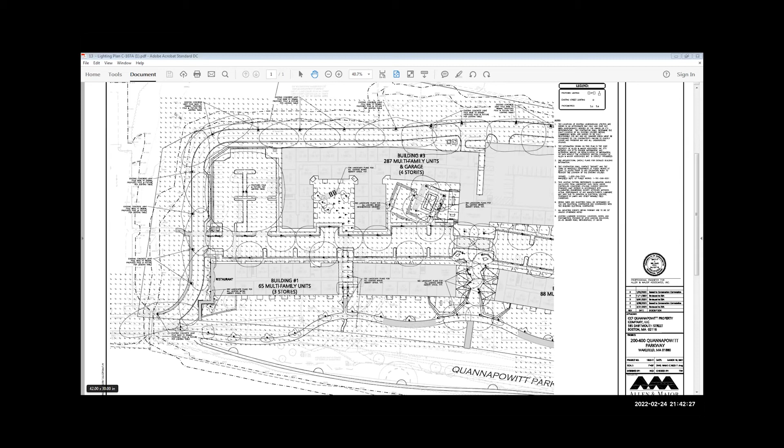All right, so where are we at here? I do think we need to go through Matt's letter. I don't know if the applicant has had a chance to review that or not. Matt was asking for some riverfront improvement. So we'd want to see what the applicant comes back with, I guess, there.

I think that Matt's letter didn't bring anything necessarily new to the table. The riverfront improvements, we've gone over that for many hours during these public hearing processes. We've documented it with multiple letters and responses. I don't see us changing anything at this point as to what's proposed in the riverfront area. I think we've demonstrated regulatory compliance, with belts and suspenders. And then his other comments, I don't see any of them needing a particular response. They were kind of high level about general consideration of the degree of work in the buffer zone and consideration of the stormwater features as they are, the wet basins, plus or minus.

So I don't anticipate a response coming from the applicant's side to Matt's latest letter. So comment 3, that he recommends a longer monitoring schedule. So you could respond to that.

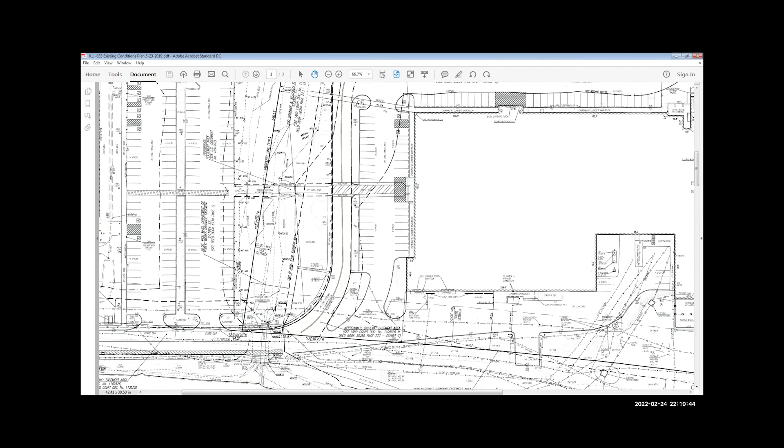Almost up the middle, I'll draw it on here for you. Yeah, if you wouldn't mind. I'm looking at one side. I see it. Okay, so you own about, according to this, you own maybe a fifth of the stream, linear feet wise, right? Right, yeah, I think that's okay. So the majority of the stream is owned by 100 Quannapowitt. No, that's not true, so this is our property right here. Okay, I see it, thank you.

At what point is the blockage? I believe it occurs over here, on this side of the culvert, and the majority of it occurs right in this area back here, which is further to that side.

On Matt Burns' point about any kind of restoration within that stream, if it's the desire of the commission to condition something like that, we can't promise anything that happens off our property, and we can't commit to any performance standard for anything off of our property. But to the extent that it's reasonable to be clearing out that culvert of any debris built up in there, if it's the desire of the commission for us to do that, we're happy to. But we can only control what we can control. Culverts or boards in other parts of town aren't something we could reasonably control as part of this process.

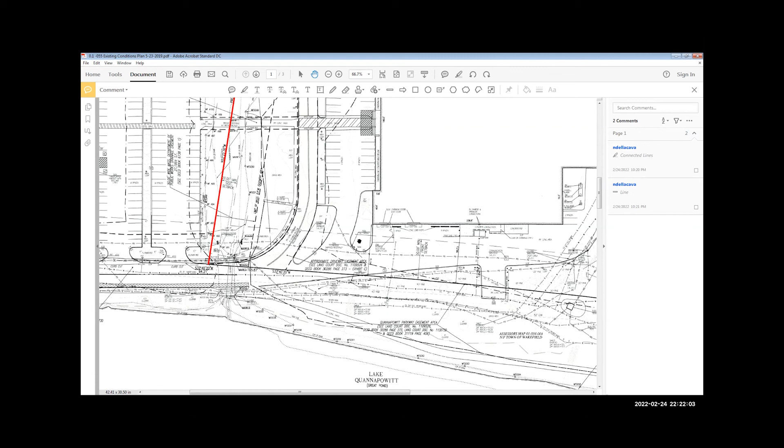So I'm looking at the plan here, to the right of the red line, and there are two lines that go under Quannapowitt Parkway. Does that say culvert? It's hard to read, but yes, this is a culvert. I'm not exactly sure on the size, probably close to a 48-inch culvert, 36 to 48.

Okay, so is that the culvert we're talking about being blocked? Yeah, I believe what Dennis is referring to is, based on my recollection, there's probably some debris in front of this culvert. It's not completely blocked — as water builds up it can go beyond the culvert, but it is pretty well dammed. Scott, you may know better. Right where your cursor is, there's a deposit of sediments that probably warrants coming out of that location.

Honestly, that's a small piece to a bigger puzzle. I think the other things that have come up about boards and flow are more important than this — the Mass DOT runoff, all of it. If there was active water flowing through that stream, it would naturally push those sediments further into the lake and make a path, but there's just no velocity of water to even do that. So yeah, those sediments ought to come out, but it shouldn't be tied to this project. It's something the town of Wakefield ought to look into, in my professional opinion. But that is the location, yes.

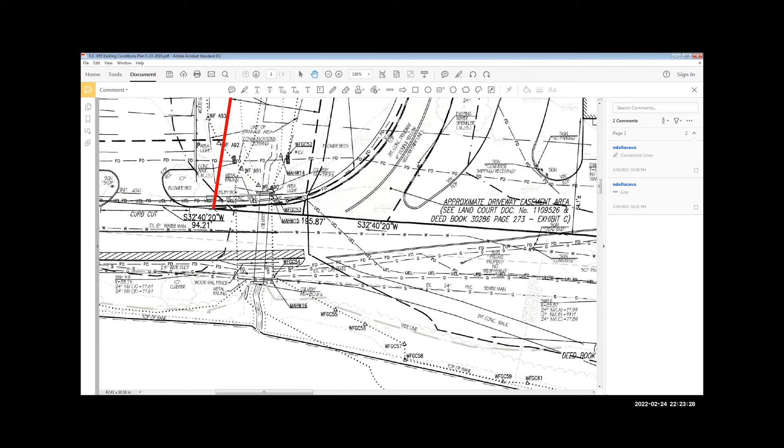So I have another follow-up question. Do you believe if the blockage were to be removed, the water flowing into the lake would carry sediments, debris, plastics, that sort of thing? Well, it would make the lake dirtier. Do you think it would make the lake dirtier, is my question.

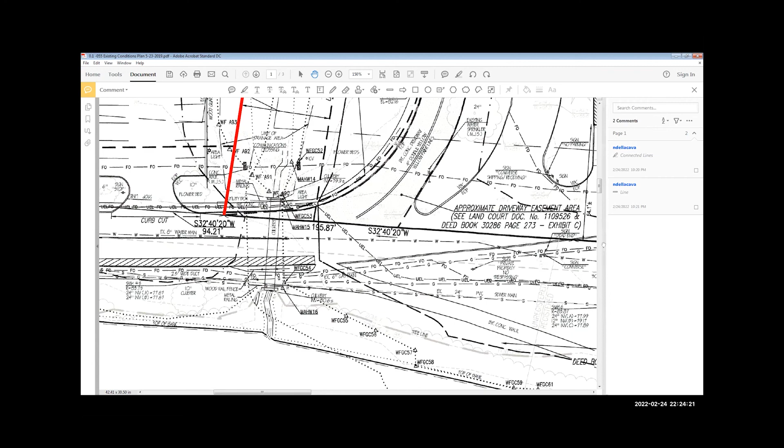We're getting a little off topic, in my opinion, but as it stands right now, there's just no velocity of water through there, so whether you remove it or not, you won't really see flowage in that direction. Second, if water did flow that way, you're getting a lot of contribution from untreated runoff off Route 128 that discharges all along there. Mass DOT does not do a good job taking care of its drainage, so there's some question about the quality of that water — we could take a walk out there, you'd see it, it's not great. But nevertheless, with some cleanup of the 128 runoff, what's most important for this lake to stop algae blooms is turnover of the water — you need water moving in and water moving out. It's the stagnant water that causes the summer algae blooms. Anyway, so again, off topic.

I'd like to wrap this conversation up. I do think the commission should maintain an interest — obviously it does — in the lake and some of these more global picture kinds of questions. This property is a very small piece of it. We've done our part, really, in spades. I have some thoughts myself as a professional, and I'm sure Matt Byrne and Dennis and others have contributing thoughts as well. Collectively, there's probably some good solutions here that would be good for the lake, but we're not going to get further on those questions or answers with this particular project.

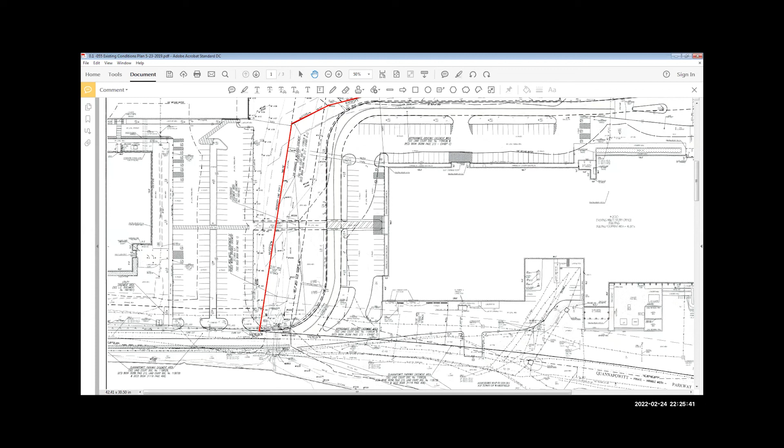All right, Elaine, any other questions? No, that answers my question. But that is something that needs to be addressed, and it's just one piece of many aspects that need to be addressed.

You probably have to have a study done there. You can't just go digging, trying stuff all over the place. You gotta know that what you're gonna do is gonna solve the problem, and the only way to do that is to have a study done.

Okay, are there any other questions from the public? All right.